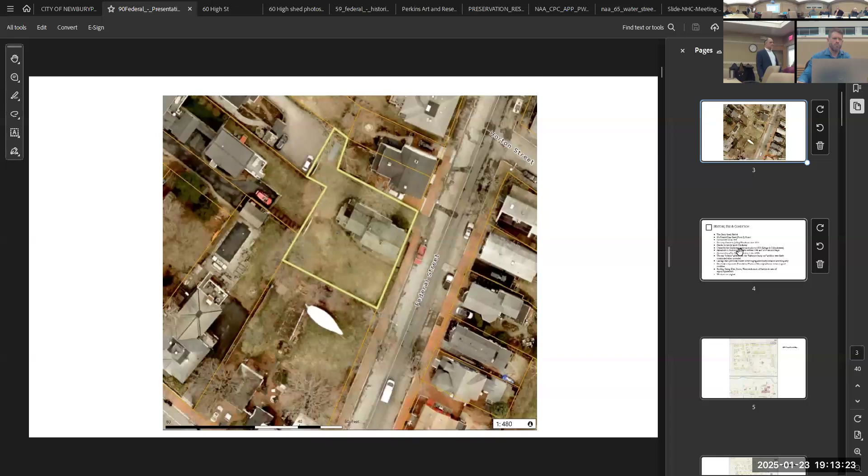Thank you, Caitlin. Like I say, we have evidence that it was converted to a two-family sometime in the 70s. I just described the condition of those bump outs, and earlier I described the carriage house that was located in the back.

We've done not an exhaustive, but a good preliminary look at the structure. Foundations are in very good shape for the two main boxes of the house. The structural components appear to be very good. There was a fire at one point in the attic, but it did not damage the structure greatly and was rebuilt.

Most of the structure of the house is in good shape and usable. There'll need to be fortifications here and there, but nothing really wrong with it.

The exterior of the house, however - the roofing, the siding, the eave trim, the doors, the windows, all the trim all the way around - has been neglected for a number of years, since Jeff has owned the property and even prior to that. Much of that needs to be removed.

We believe the siding on almost all of the house is asbestos shakes that are obviously not original to the house. The windows are obviously not original as well. In one of the pictures you might be able to tell they left an original window up in the gable in the attic, and the rest are replaced - there are even some storms on some of them.

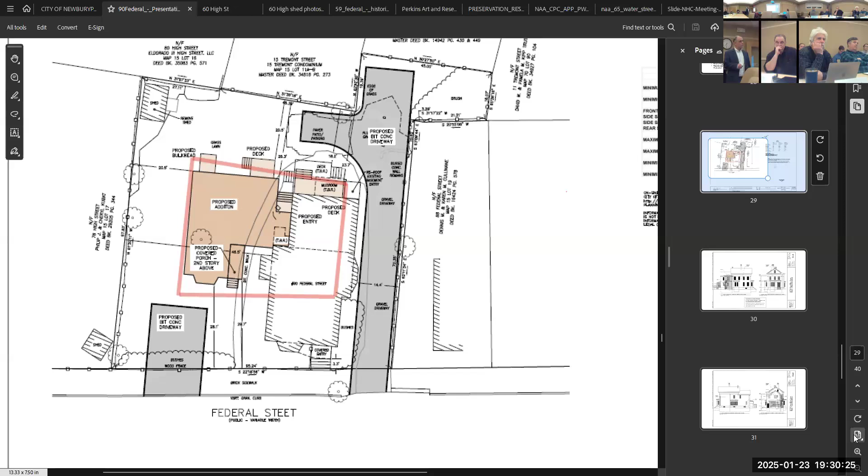Our proposal is to add on a wing, if you will, to the left side of the house into the yard. If you want to go to the next slide. We also propose to remove the shed, by the way.

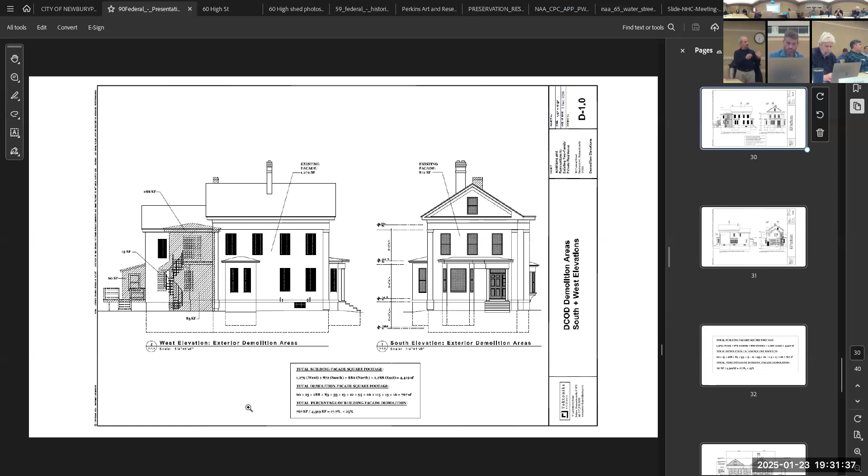Good evening, Ernest DeMeo, Tektoniks Architects. With the demolition, as John mentioned, this is the portion of the building that has a bathroom addition that we believe dates to the 1970s. We would remove that. This is the mudroom bump out in the back and the deck that is integral with the mudroom, which we would also remove. Apart from that, John mentioned we would remove all the windows and replace siding, but the intention is to maintain as many of the profiles and trim as we can. Obviously we'll replicate where we need to, so the character of the existing building is maintained and upgraded.

Next slide, this is the rear view of the building. You can see this is the mudroom portion right here that would be removed. There's actually a little head house here, which I suspect may have been a bulkhead at one time, and when the mudroom was added it was made taller. We're gonna keep the walls of this, or replace as needed, and keep that doorway serving the basement, but remove the deck and the mudroom.

This elegant second means of egress spiral stair would come out with the bathroom addition on the side of the house. Some windows will be removed, some new window openings will be created. But for the most part, as you can see, the side elevation on the driveway side we're leaving mostly intact, except for one window.

A question, since you mentioned windows and traditional windows - do you know now what you plan to replace them with, what type of windows you plan to put in? Since we talked a lot about preservation and all that. No, we don't, and honestly we're gonna try to do some more research to see what the original muntin pattern might have been on this house. We did find one photo and I've got to study it a little better, but I don't know if the windows were replaced prior to that.

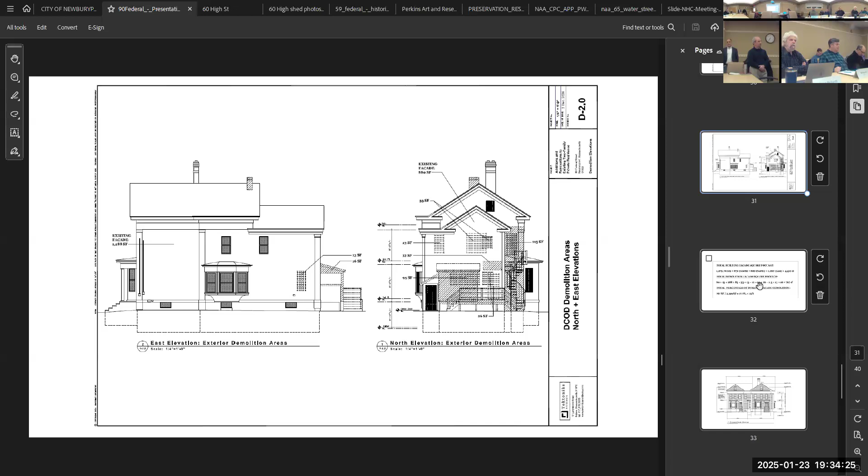Okay, these are the demolition calculations for the facade. We end up at 17.5% total facade demolition, less than the 25% threshold, so we comply. Next, elevation.

This is the front elevation showing our addition. The existing portion of the building is refurbished here. This bay is part of the original building, then there's a connector piece, and then our addition in front, which picks up on eave lines, roof slopes, and window patterns.

Even some of the projecting elements. So this facade in two dimensions—we have some three-dimensional images you'll see later—but in three dimensions, this facade is actually set significantly back. About 18 feet or so.

It's actually in the same plane as the front face of this bay. So when we get to the 3D views, you'll see that it doesn't come any closer to the street than the bay immediately adjacent to it. And this back wall, which appears to be a tall wall up forward, is actually set very far back, almost kissing the back corner of the original box, which leaves that side of the building, the original facade, almost entirely visible.

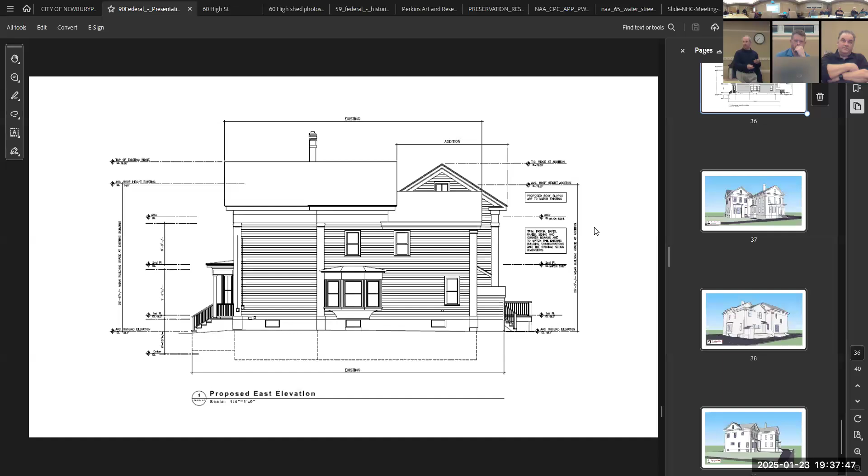Next slide, please. This is the driveway elevation, which is largely unchanged except for a window we're adding in the back here. This is the addition peeking out from behind the original building. The peak of the new addition is slightly lower than the peak of the original. The slopes are maintained, but because the width of the building is slightly smaller, the ridge line is slightly lower. We did go to great effort to match cornice lines and eave lines so it appears to be all a unified whole.

This portion of the addition has a frontal reading to the street similar to the original house, with a notch in between, let's say. This entrance would be for the unit that would occupy this portion of the building, and this entrance is for the addition portion of the building.

Next slide, please. So this is the rear of the building. This is the driveway along the side. This is the existing head house, which has a new roof placed over it to replace—the roof is integral to the mudroom and we have to remove it and then replace it with something.

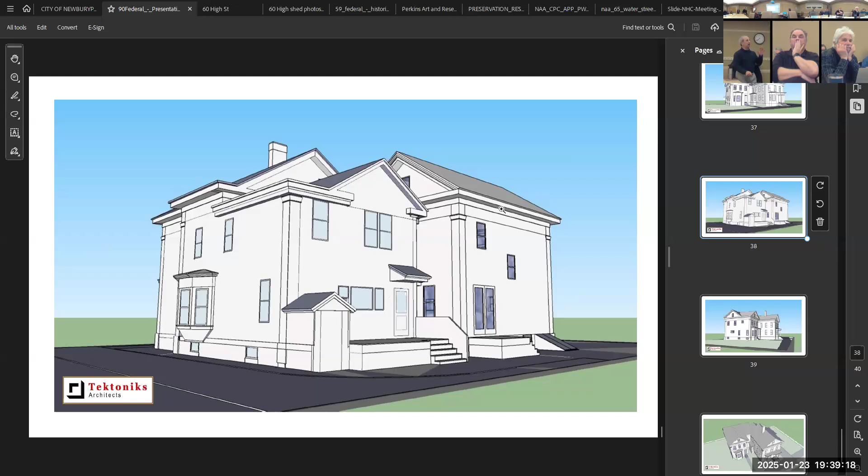This is the deck that we've added in the back, which projects no further than the mudroom that's there now. We remove the deck from behind. This mass right here is the original, or the large portion of the building that we're retaining, and this portion here is the addition beyond, with a notch in between the two that you don't see in this view.

This area right here is where we are proposing a connection between the new roof and the existing roof. There's about less than 5 square feet in plan of overlay of one roof to the other, so very minimal. And as I mentioned before, eave lines extended, picking up on the original.

So that's an overview of the approach that we like to use. Okay.

But any clarifications before we have a public comment period? Any questions? I'm kind of curious about the building materials. It sounds like it's a little vague, that you're not sure yet on the siding.

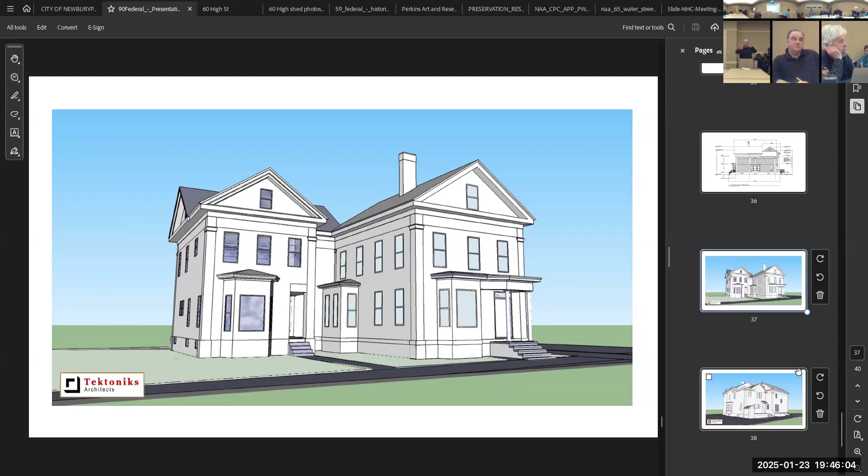Well, one of the things, I have two comments. One is that the distance between the more forward piece on the left and the existing has a notch there, and the notch is actually set back 18 feet or so. And I think if you were to go back and look at the aerial plan, you would see that the rhythm of those masses is more similar to what's happening on the opposite side of the street, which has, in some cases, separate houses that are fairly close together.

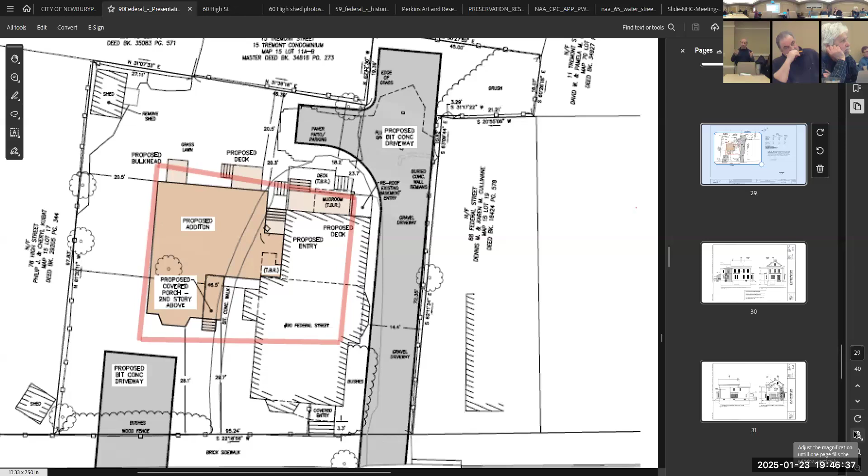I think having that rhythm of a gable piece fronting the street, and then another gable piece fronting the street with a notch between, is not dissimilar, out of context. Another point is that we're not showing color right now in this presentation, so it's possible you could use similar materials for both pieces but not necessarily replicate color exactly. You could distinguish one from the other with a little bit of difference in color and tone, that would allow them to stand a little bit apart.

Sounds like you two talked about this somewhat. Did you explore, for example, maybe not having quite so much of those molding details at the top of the side, the corner posts and that sort of thing? Was any of that discussed? Yes, kind of having it be recognizable as Greek Revival, but maybe not quite so.

We've looked at many iterations and it's gone many places, and we're open to it going more places. I appreciate I've been before this commission and ZBA before for similar types of projects, with significantly different approaches and received a variety of comments. So, the short answer is, we had this debate, and we arrived at this as perhaps the best looking scenario.

We need to move along. Any other deliberative comments from my fellow commissioners? Sure, I mean, I think the first thing I was thinking too is that it's too iterative of the original property.

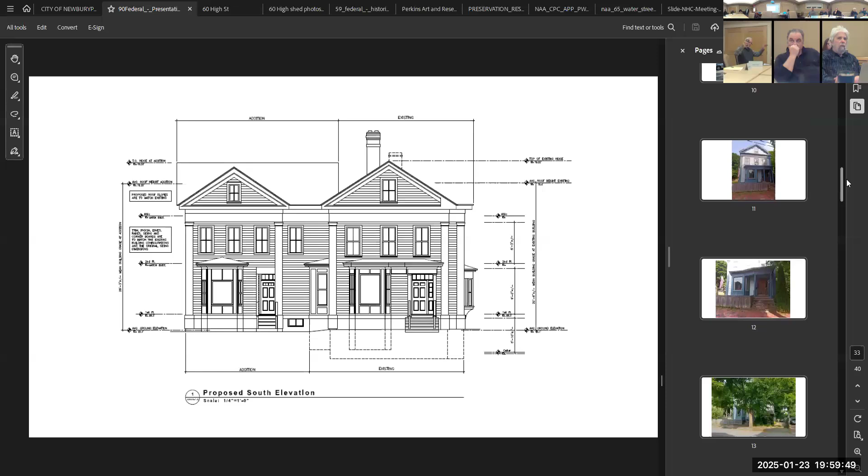The only other thing I would like to add is two things. I'm looking at this on Google Maps. I get you saying the front step is in pretty rough shape - are there historic photos of what the front porch originally looked like? Because I find the thing funky, like there's just the brick steps going down, but there's the front porch that extends over to the bay window. So I would ask that you reconsider how that all goes back together.

And the other thing is, going back to - nothing about the dark trim there says Greek revival to me. And I don't know, since we're asking you to look at specifying windows, etc., can you say whether that's a Greek revival bay window? And even on the new addition, it looks like you're trying to echo that, and I just don't know if that reads right to me.

The only thing - I found a photo from the 1800s, or early 1900s, that has it there. And I was, like you, expecting not to see it. That's the only photo that I found thus far.

I'm happy to take a little more time and dig in, and similarly I'm happy to spend some time digging into the roof too. We'd love to keep it, we'd love to repair it and have it there. Another thought, just thinking out loud - a way of differentiating the structures might be to put a metal roof on the addition, which would be expensive, but rather than alter the trim and styling of the building itself, maybe another way to handle that is with a completely different roof. Just a thought out loud, I get it.

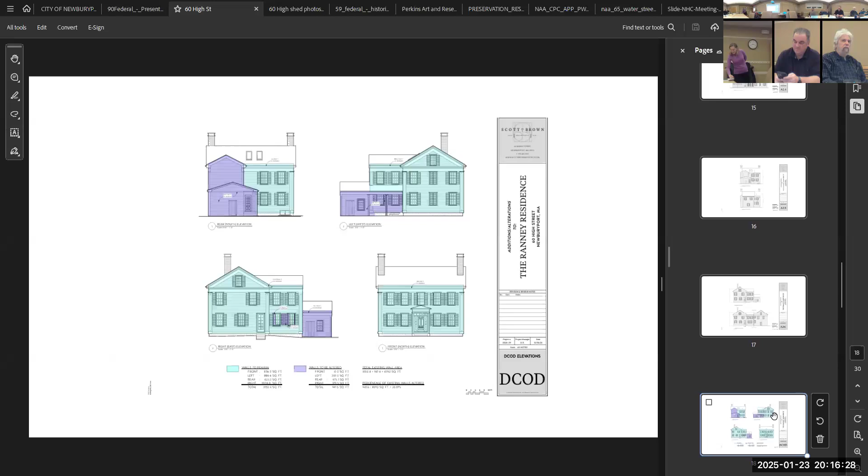Why don't we try slide 16 or slide 21, there we go. So this is the main structure - it's set back, it's actually set in on both sides a little bit. I should have brought a picture with me. It does not come out to the street to the same depth, so it looks like maybe about 10 to 12 feet.

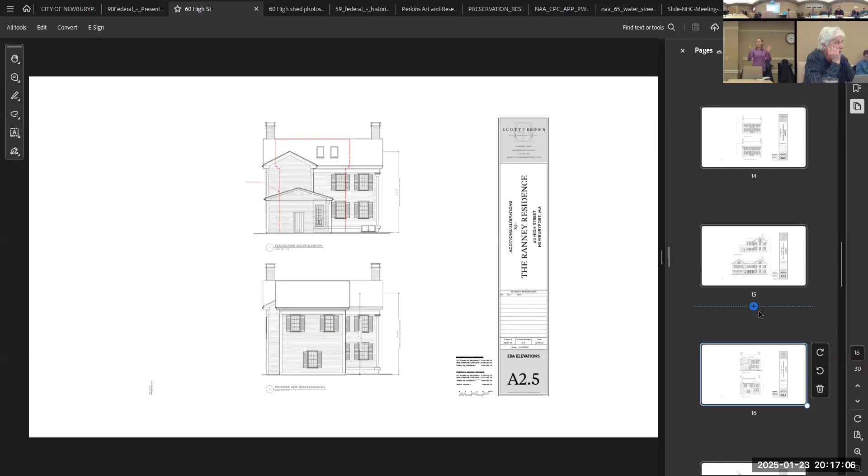So the height does match, and one of the reasons we really wanted to do the height to this level is, again, going with the theme of today's world, we'd love to put some solar panels on and don't want to do that facing High Street. We want High Street to look like that beautiful historic home. If we have that height there, it will still face south and allow us to put some solar panels on without really impacting that frontward facing view.

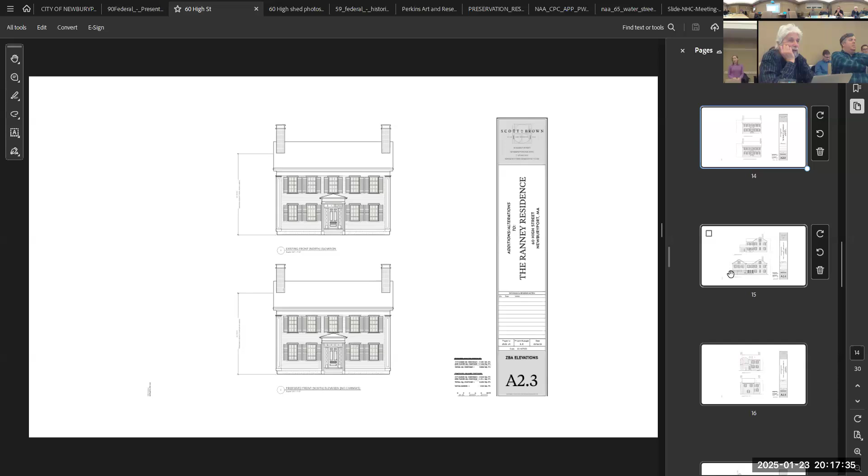Okay, so this is the front here, right? So this is the High Street facade? Yeah, and if I understand correctly, they're not changing anything there, it's all in the back. So it is visible from Lime Street, but not from High Street.

And then if you look at it from Lime Street, if you go down, I think it's around slide 21 where we have the pictures outside of there. Yeah, we do have, there we go. The section, I tried to highlight it here.

It's really in this area right here, so this part of the house, we want to preserve that historic look and feel. It's this section right here, where you'll see it kind of behind the trees. And then again, we'll be more conforming, we'll have that space between the yards and be a little bit more in compliance with the code today.

Right, and you can see the garage there, or shed there, that's being demoed.

So, not that it's a major consideration, is there gonna be room for those trees to stay there? All but one — there is a cherry tree, you can't really see it very well. This one will have to go right here. But the new driveway cut that will come in, we can continue to preserve this tree. We've got another elm over there, and this tree won't be in at all, so it's one that's set in the yard.

Is there anything more to add? If not, we will have a public comment period, but before we do, any clarification questions on the part of the panel here? Anyone want to ask? Zoom commissioners, anyone have a question for Heather? Don't really see any. Okay, so maybe a formality, but let's see if there's any public comment period.

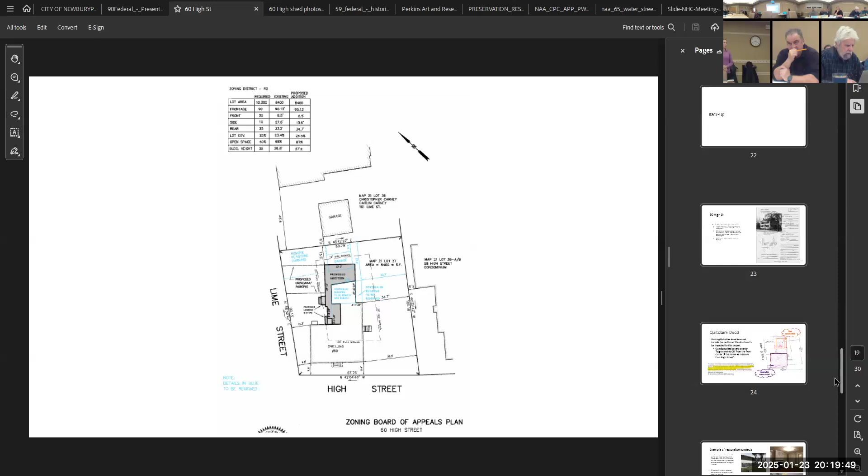So our deliberation — what do we have, two, or one, but we have to take on whether it's preferably preserved, right? And then after that, if we so desire, we can vote on whether we either approve these plans as they are, or have some changes like with the previous person. So anyone have any comments, thoughts, questions?

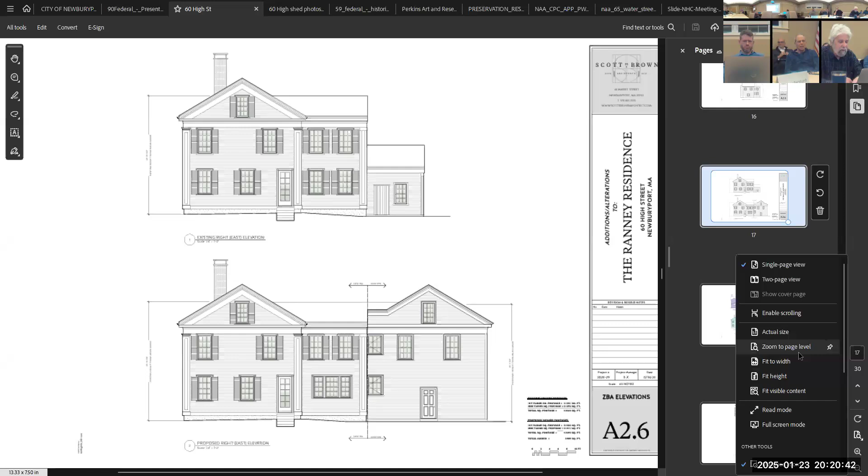Can I just see the garage doors again, the picture of the garage? Well, in a way it's kind of moot, Andrew, because the garage has already been okayed for demolition. Oh, no, I thought they're building a new garage. Oh, I'm sorry, thank you for clarifying.

Yeah, you're right. Is that a metal roof as well, where the overhang is? It looks like a seam. We haven't decided fully on that, so I'm very open to thoughts. That's how I read it, so I was just wondering.

And the lower windows, the three of them, they're different on the old part. What are they? Is that steps? Which ones, right here? Those darker ones. Yeah, the darker one.

This is interesting, and I'll find a slide to show you, but this is meant to be a sunroom. What we have here is actually gonna be open to go into the house. In order to preserve the windows on, I guess, the north side of this section of the house, we have to keep this as an open walkway.

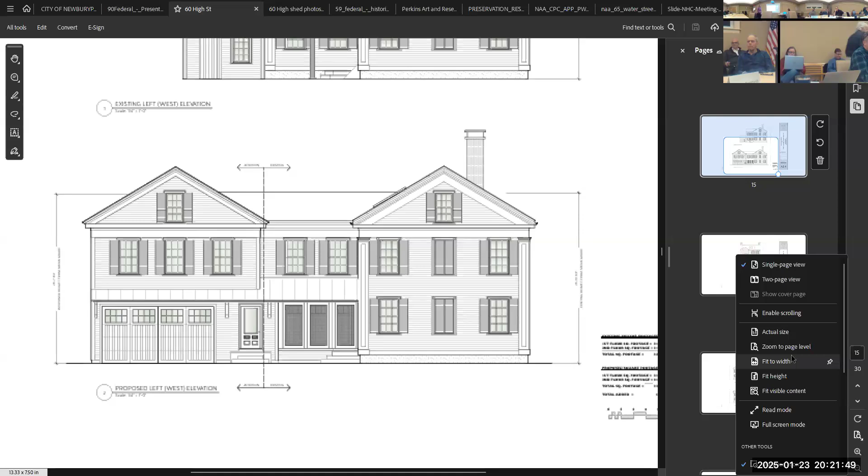What slide might it be, do you mind scrolling through? Can we go back up? Not, definitely not in that. You do? Maybe. There we go, wait, sorry, we have a top — I'm looking for a top down view to show.

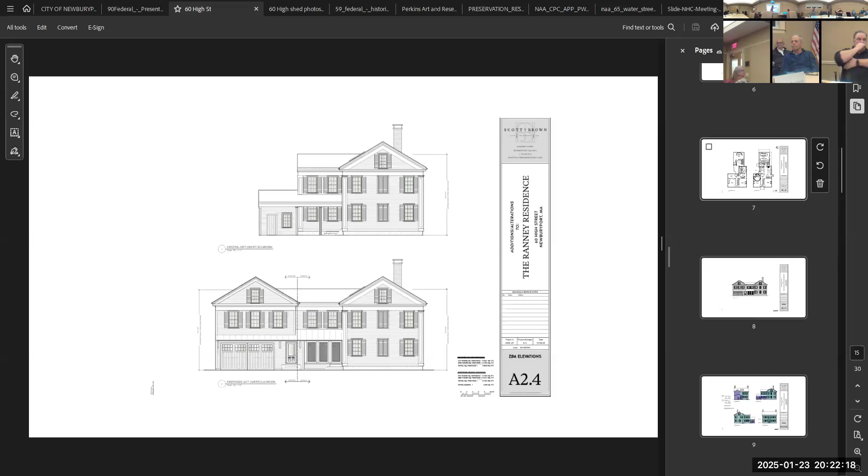Maybe we could look at this one right here and try to explain it a little bit more. So the way it's intended to be is that this is an opening that comes in, so it's screened, I would say, or more like a glass door coming in. Right now, this is just an open overhang. But again, we have important windows that are of historical significance right here that we didn't want to impact, so it's kind of a transition place that goes in right there.

I see it, but keep that window there. So our dining room window wouldn't be able to survive - those darker ones don't look like glass, just screens. They'd be glass in the winter and screens in the summer, meant to be a screen room or sunroom. So those would not have a 6/6 kind of style - we want those to be a nice big screen.

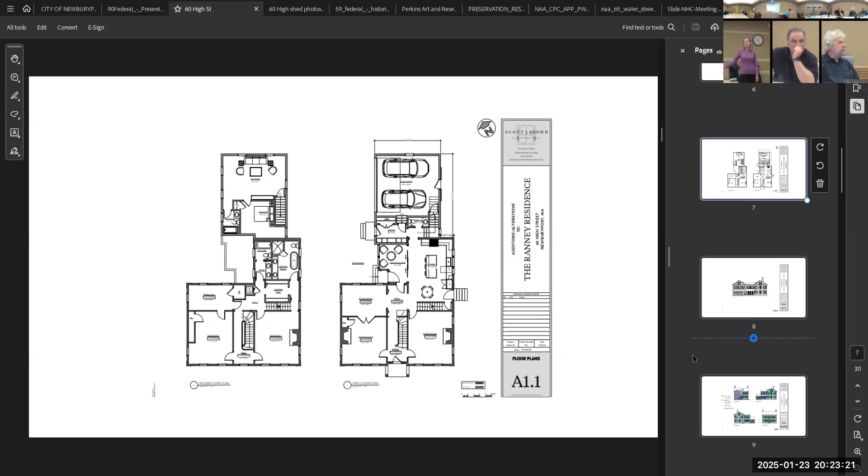The only comment I'll make is that when I first saw this, it reminded me very much of the one we just looked at earlier - it's very imitative. I think it's extremely similar, as far as this feels like a little copy of the house being put behind it, and I'm not generally a fan of that.

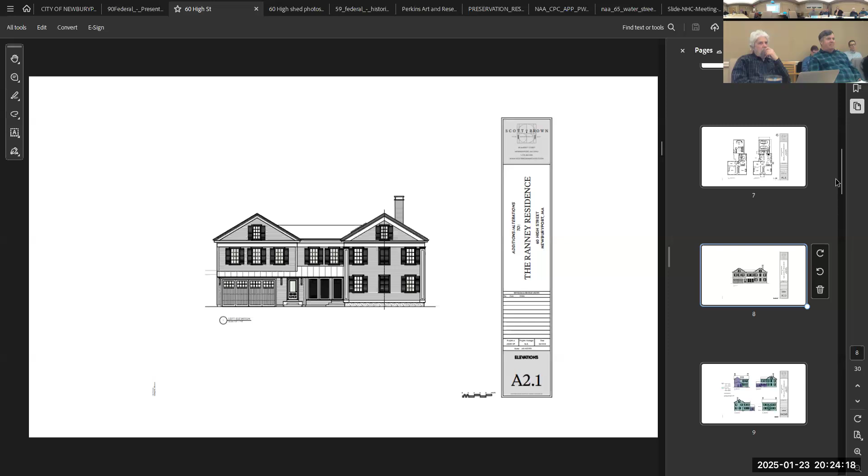But I do think this one is different from our last one in that they're not redoing the main part of the structure along with this addition. So does this addition significantly impact the old home? Is the massing and placement of it appropriate? I feel like it's hitting most of those marks for me - having the first floor be a garage helps set it aside, and the garage door is differentiated for sure.

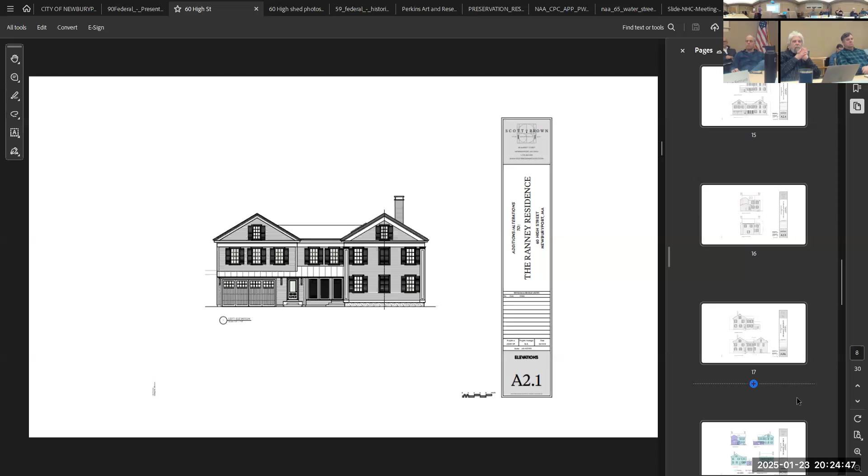Caitlin, can you go to one of the plan views? I just want to get a better idea of the scale of the addition versus the house. All right, put too much in here, didn't I? Might come over to one of those plans - keep going down, keep going, right here - this one would probably help.

So this is the current space, and this would be the expansion of it, if that helps. This darker shade is what's being added, and then the garage back here is removed - the garage is within that front space. Looking down, that's High Street at the bottom, right? Correct. So the only thing new is that darkened area?

The new part is this darkened area, and this little box right here is the shed that we're getting rid of. So this will become open space where it currently has a building, and there's an increase, but we're still within the zoning tolerances of lot conformity and percentages, and we're actually bringing it into conformance from setbacks. It's pretty amazing how in this view it looks a whole lot smaller - when you take a three-dimensional and push it down to two.

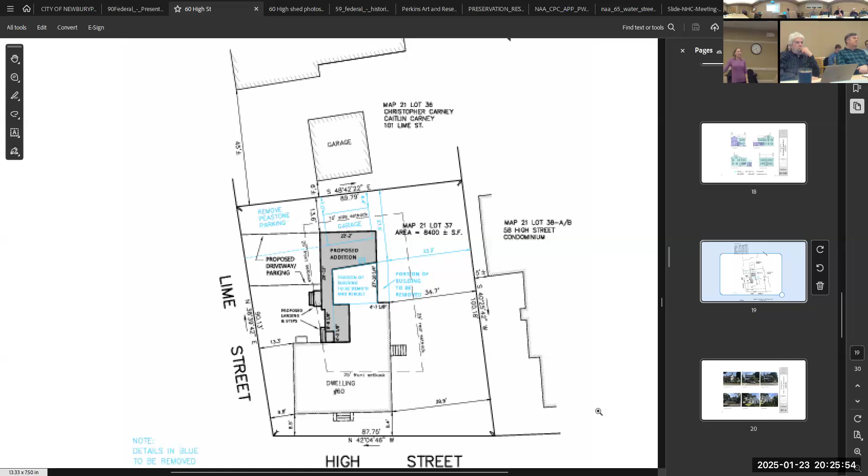So basically this is being removed completely? Yeah, that's where some of the room for your addition is coming from. That's why they're not adding as much footprint, because they're using that as part of the addition. But it will be pulled in from the main structure on both ends, so it will be a reduced size from the main structure.

I must see smoke coming out your ears. No, no, no, I have a question - correct me if I'm wrong, only because I've been looking at some of the properties for the agendas.

Is this the property that has the preservation restrictions on it? I don't think so. There was a quitclaim deed on the front side of the house - the details are in here. If you want to go down a little bit, I'll show you what the quitclaim deed covers. Good memory, that's it. So can you keep going? What's it called? A quitclaim deed - it's written into the deed certain things you can't change. Yeah, right here, this one.

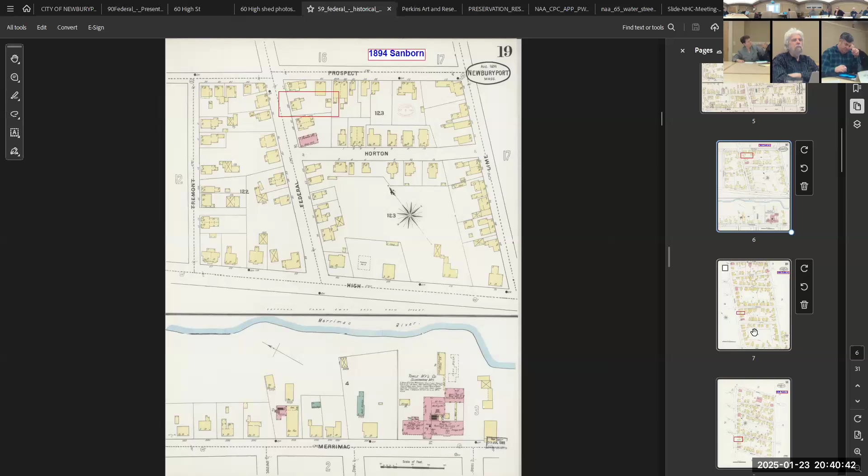There are actually 3 main structures on it, and then there's a building in the back. Next slide, please. This is the 1894 Sanborn map, and you can see down towards the middle bottom of the page, you see the structure there. Still all part of one, and again you've got a different structure in the rear that's actually on a different lot. I think it calls it a woodshed, maybe.

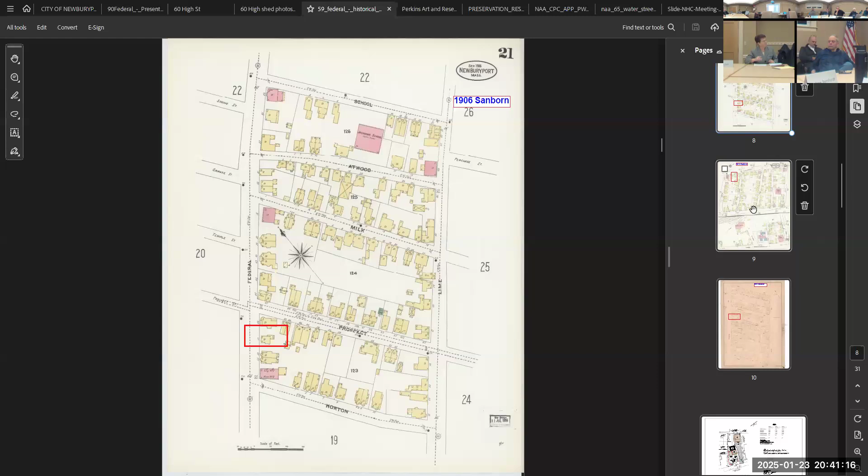Next slide, please. Then you have the structure, this is the 1906 Sanborn map, and you can see the structure down on the left of the page. Next slide, please. And then here's the 1914 Sanborn map. On these last two, you can see that side porch on the left that we're proposing to take off doesn't exist on these older maps.

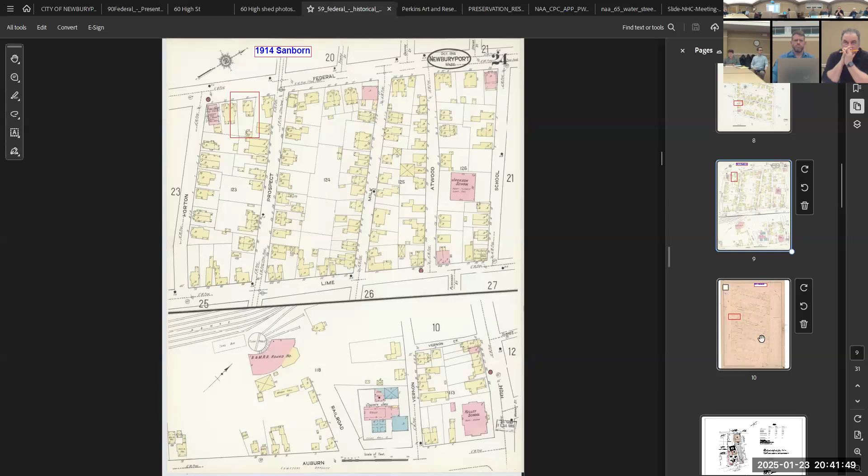And then in the rear is that one-story addition that currently has, we'll show you some photos in a minute, a handicap ramp that runs up into it. If you could just hold it here for a second.

So we had a professional engineer, structural engineer Fred Emanuel, and Deb and Christian go in from Emanuel Engineering and review these additions on the property. Two of the existing additions are in poor condition. The framing size on the sun porch roof, on the left side, is inadequate for sliding snow and is subject to collapse. You're gonna see some photos of that in a minute. And the weight of the porch is assumed to exceed the soil bearing capacity, it's right on top of the soil, which we'll show you in a minute.

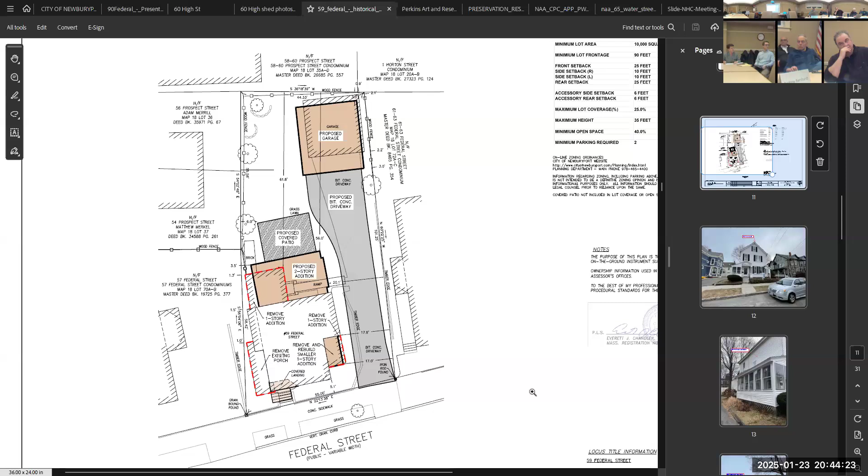I might add that the addition in the rear that we propose to remove is very close to the lot line, so it's at least gonna gain a little bit more distance away from the side lot line.

Pardon the interruption, you talked about the structural handicaps of the additions in the front, did you talk about that addition in the back? That's the one I was talking about, there's handicap access into the addition in the back. Did I somehow miss the discussion of its foundation and all that? Oh no, it's not even close to as severe as the others in the front, but it's definitely not up to what today's standards would be. It's a standard 8-inch block foundation, I would assume probably 2x6 rafters. It's like a volume ceiling inside, so drastically undersized from what it should be.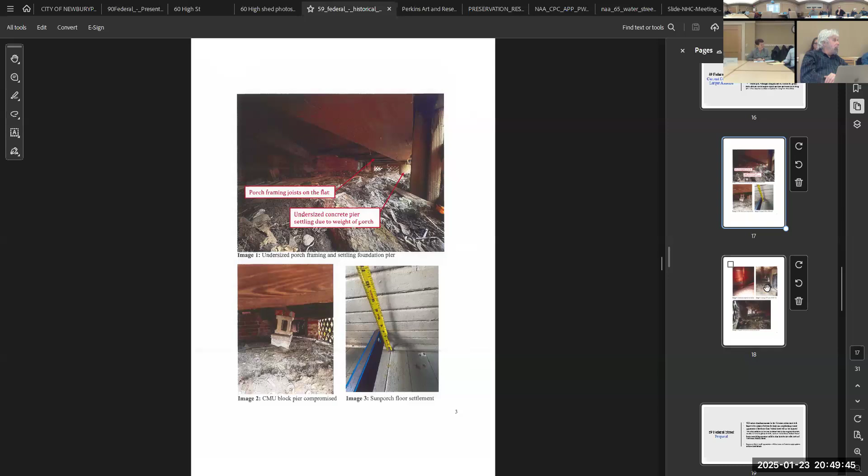Next slide, please. And then you've got that's under the sun porch, the undersized roof rafters on the left, and the leaning CMU at the bathroom addition on the right.

And then there's an old pair of sneakers under there, which - there was a preservation restriction on exactly that debris. I think they're canvas, not leather, so it might be okay, right? Okay. Next slide, please.

So as I said, Matt will talk about the restoration of the architectural detail, particularly the Victorian features. It's going to improve the distance between the home and the neighboring property. It will improve dramatically the appearance of the home from Federal Street - in fact, it won't impact it negatively. And as I noted earlier, the two-story addition proposed in the back will be subservient to the main structure.

So if you go to the next slide - here's the house, and you can see a little bit the scallop siding at the top and along the edges. I think it's a good representative of what it used to look like, or what it may still look like underneath the siding, we don't know. But that detail's all proposed to be restored.

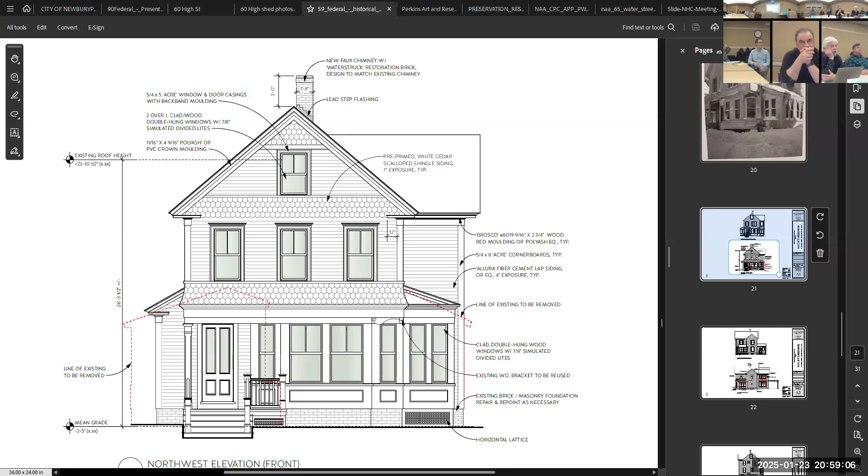As long as we're on the photo, I'll mention that when I first saw these plans, it was before I saw the photo. You can't really see these angles much, but then I saw the photos and thought, oh okay, that's great—you have actual evidence, which is what the standards call for, so you shouldn't just guess. You can still see those peeking out from the vinyl siding there. But that thing's covered up, yeah.

Is the front door of the new proposed design recessed into the front facade, or is it flush with the existing front? So it's not flush with the bay—it's flush with where the bay ends, if that makes sense. Where this 45-degree angle bay comes back, that's where this wall is, so this wall is pushed back about 2 feet from this wall.

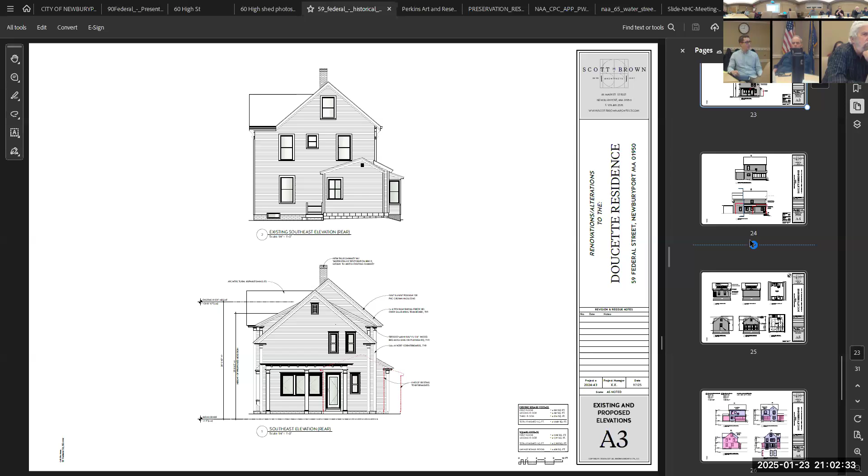So this is the final elevation. This is the left side, the side that's closest to the lot line. Even though we're removing that porch, which improves the distance to the lot line, we're also choosing to go with a little less fenestration, or punches for openings, for privacy. But in general this space feels a little better in the sense that it has more breathing room from where the current lot line is.

And in general, materials are pretty consistent with a lot of what we've done in the past: rot resistant trim, architectural shingles, white cedar shakes. We're proposing fiber cement for the clapboard, 7/8 simulated divided light double hungs, and also a couple of accent metal roofing on the bay on the opposite side, and chamfered wood columns—trying to use as many high quality materials as we can to enrich the exterior.

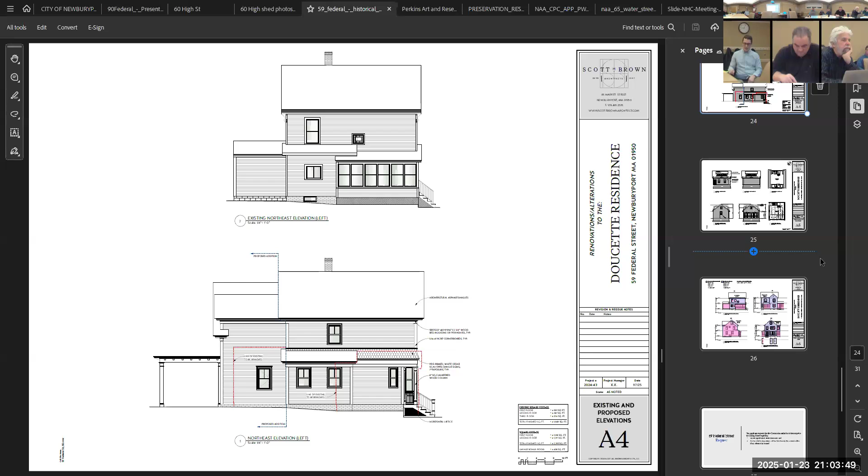What does the 7/8 refer to? The 7/8 refers to the simulated divided light, the width. Oh, 7/8 of an inch width. Yeah, exactly. Next slide, please.

From a square footage standpoint, before I get into the DCOD, the existing total is about 1,949 square feet, which incorporates some portion of the existing walk-up attic. Our proposed total is 2,310, which removes that walk-up attic—that would essentially be a pull-down with storage. So our net difference is 361 square feet. The garage bonus room, on the following page, is an additional 438 square feet. So we're essentially removing any access to the attic and putting in auxiliary space for an office or bonus room above the garage.

So the DCOD calculation is something we battle with every time. Lisa, I mentioned this before—it seems big from a percentage standpoint, but if you just removed the porches, not even including the addition in the back, it accounts for over 14% of the total of what we're asking for. That would bring us down to about 994 square feet. And that doesn't include the addition in the back, but it's a significant portion of what we're asking for, so if you just remove those two pieces, it brings us closer to 33%, which is a huge chunk of that. I think it's worth mentioning.

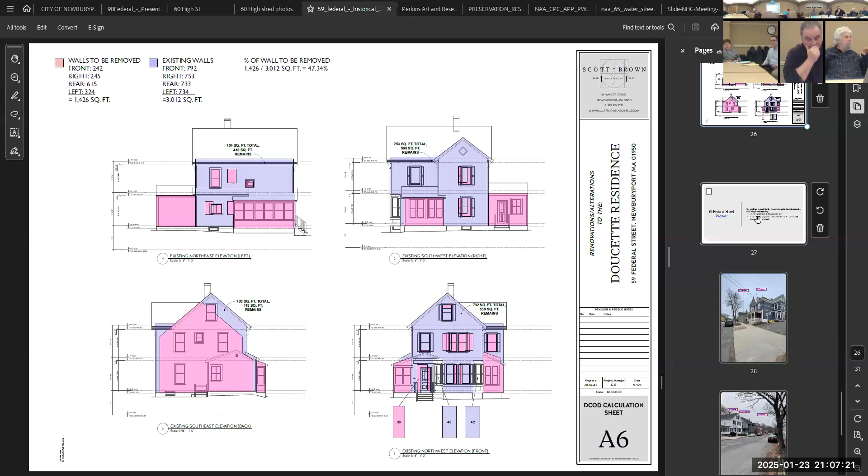Thank you. It sounds like, just to sum up in one sentence what you said in a paragraph, that you were willing to sacrifice the square footage for the sake of a better design. Right.

A better design that we think maintains the historic fabric. That was kind of implied in the term 'better.'

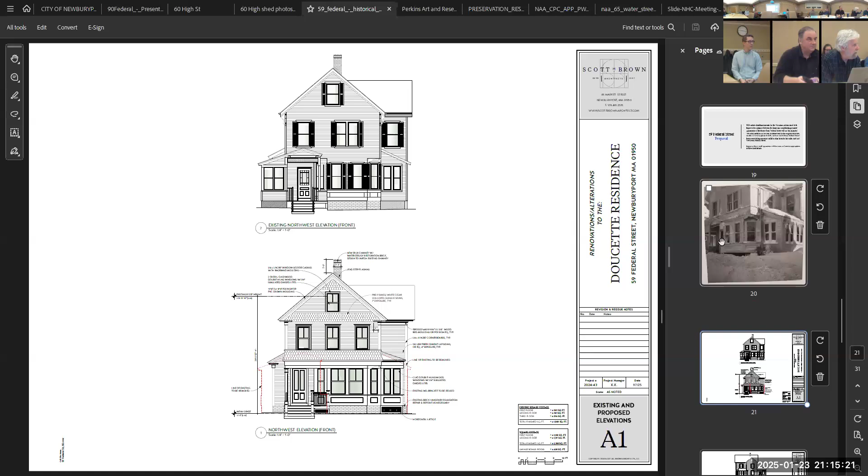Caitlin, could you go back to the photo for a sec? Do we know when this photo was taken at all? When was the last time we had that snow? No, I'm just kidding. I mean, it might be... looks like the 60s. I was going to say late 50s, 60s, right? Don't you think?

It's a square photo too. You're looking back for that detail — yeah, that's right here, you can see it. So it's almost like a reimagination of it, so to speak. It's taking it from what may have been more slightly Italianate in style to a more traditional Victorian style. You're nodding — yeah, that's about the size, that's about right.

Yeah, with these brackets too, with this Victorian style, you can sort of go crazy — we've had some examples where that bracket continues up the gable, so it's about choosing when to do it. This open rake detail, we just didn't think fit with what we were trying to propose in the back. So we took what we were doing in the back and wrapped it around the front, letting the bottom half be the more traditional part.

Does anyone remember what the district data sheet called out as the style? I think it's on there — you're saying, let's see what they called it back then.

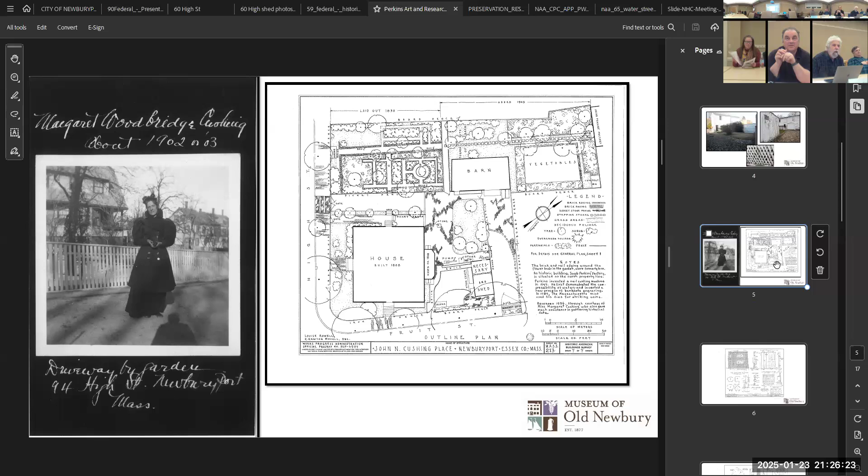Okay, next slide please. And here she is, Margaret Cushing on the left, standing in front of one of her garden fences. This is the plan that was done in 1936 for the WPA, and as you can see, careful, measured, detailed drawings of all the fencing exist there. If you want to just go through the next slide, it not only has the overall plan...

...but details of individual fencing. I mean, how lucky are we? Individual fencing profiles, it has cap profiles, it has everything spelled out for us. They did it all. Next, please.

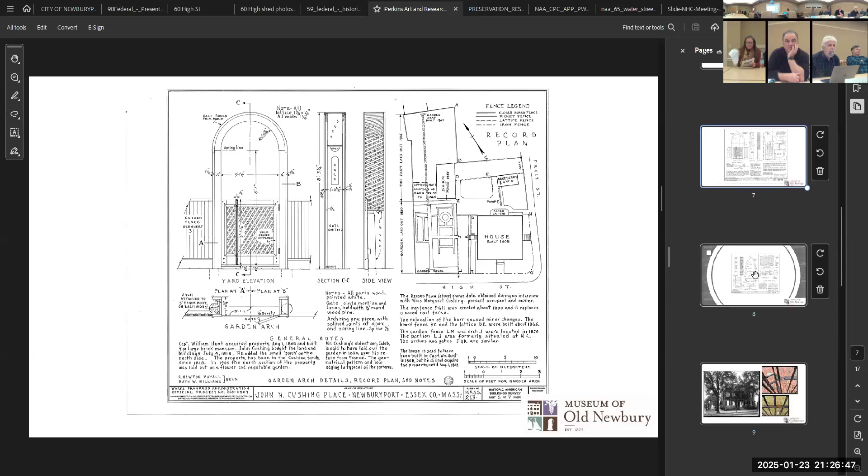This is one of the other arches that shows you where it is in the plan. It's reminiscent of those house drawings—isn't that beautiful? And then there's this garden seat, up against the Perkins building, which has been significantly restored. It's the same as the beautiful house drawings, filed with that project.

Moving on, the iconic iron fence was built in 1890. In the photo on the left, it's seen fairly new in 1894. It's remarkably stable for its age, but is in need of preservation to ensure another 135 years of useful life. Rust and paint loss are evident throughout, and some joints have broken, as you can see in the top right photo. The gates no longer close and are kept in place with bricks. So the iron fence will not be replaced, but restored by a firm specializing in historic wrought iron fencing.

Obviously the fences on this property have changed over time. I had to throw in some good historic photos to keep your attention this late in the evening. What you're seeing on the left is the weird place on Fruit Street where the iron fence ends and the wooden fence begins. There's no tie-in between the two, and doesn't seem to have been one when the metal fence was put in. It's always been awkward and needs to be rethought. We have a fence designer and preservation carpenter working on it—it'll look the same from the outside, but it's currently a magnet for moisture and mold, so we need a more substantial post to manage that transition.

The iconic 1934 garden house, which backs up against the High Street board fence, was designed by the architectural firm of Perry, Shaw and Hepburn, who were at that time working on colonial Williamsburg. It was also studied and documented. It backs up against the High Street board fence and has several sections that have rotted. The lattice work also needs to be replaced.

It's also in fairly good condition, just in need of some repairs in areas that are rotting, and it obviously sees a lot of weather. That's really quite architectural—I was already seeing its little roof peeking over the fence as we drive by. Why don't you come to the garden and consider the inside?

Since the landscape restoration, we've seen a lot more visitation. Honestly, since COVID, there have been a lot of people who didn't know that was there before and were exploring the neighborhood in a way they hadn't before. Now we see a lot more people who just pop in to sit in the garden and read a book—not this week, but at other times of the year. So that's really been a fun discovery for people, and a historically important structure in and of itself, this house.

Elements of the Cushing House fencing were not only decorative but practical. A gate over the cobblestone drive, seen here, had its hinges fail, so it's now leaning against the existing fence. But it had a gate over the end of the driveway, which enhanced security and shielded equipment in the rear of the privy shed from view. Because of the different elevations of the sidewalk and the drive from when it was installed, it will need a slight curve, so it does need to be rebuilt. When the hinges failed, it was kind of nice not to have a gate over the driveway, but it did have one, so we're going to do it.

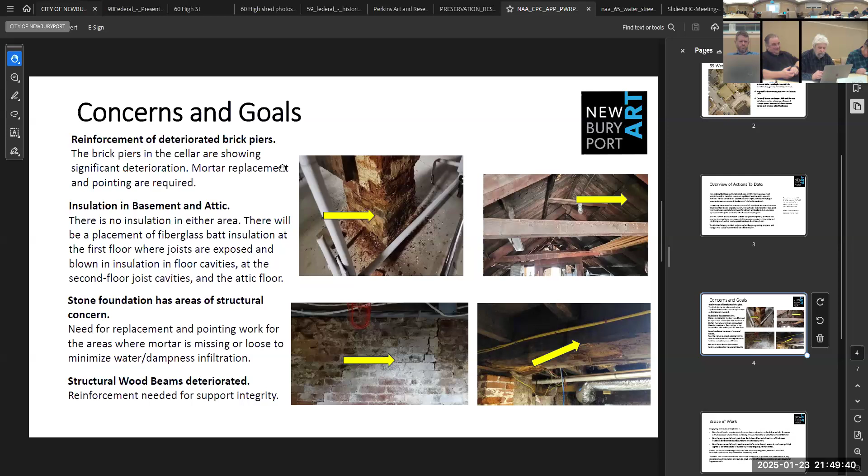Okay, the chair is reluctantly in favor. Mr. Sartell, how do you vote? Yes. Mr. Ed Neumer, yes. Okay, Alan Marquis, yes. Okay, Mr. Fay, yes. Okay, Scott Clark, yes. Biff Faust, yes. And Andrew, you're setting precedent, yes. Well.

Okay, with this next item we can go very quickly. I'll go ahead and make the motion that we continue this discussion of the preservation restriction for the GAR. I think he was just gonna come back with the... oh, I'm sorry, you're still here waiting to hear what he said. Before I move on, I should say you're good to go. If you wanna go. I was wondering. You're within the, you don't violate your preservation restriction, you're good to go there. And we will compose a memo or letter to the CPC encouraging them to support your work.